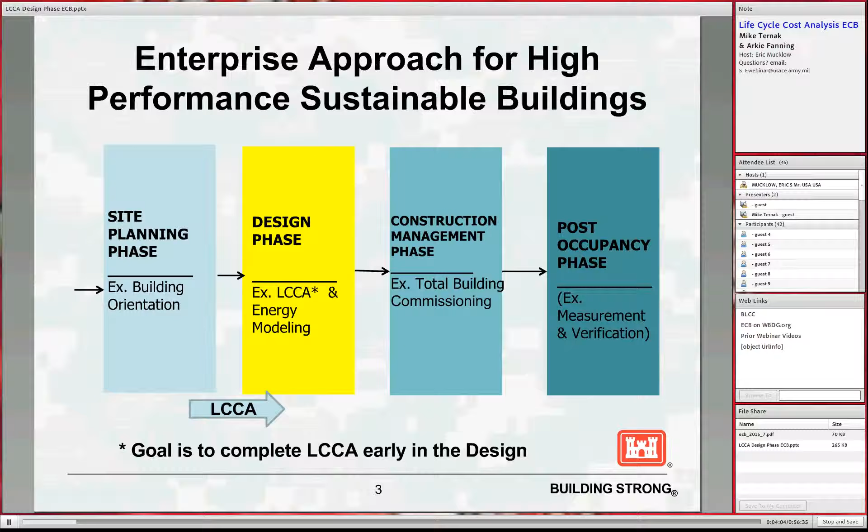So LCCA is an important part of this enterprise approach. It takes into account all the costs of acquiring, owning, and disposing of a building or individual building systems and identifying the most economical alternatives. So one of the most important takeaways from today's webinar is that it's important to complete the LCCA early in the design phase, while there's still a chance to refine the design to ensure a reduction in life cycle costs.

Well, why perform LCCA? First, because it's legally and policy mandated to us. Federal administrative laws require that buildings be designed based on the lowest life cycle cost or most life cycle cost effectiveness. And this is imposed through the Code of Federal Regulations on all federal agencies. Then if you drill down, DOD has separate LCCA guidance through a Tri-Services Memorandum of Agreement on criteria standards for LCCA and economic analysis for MILCON design.

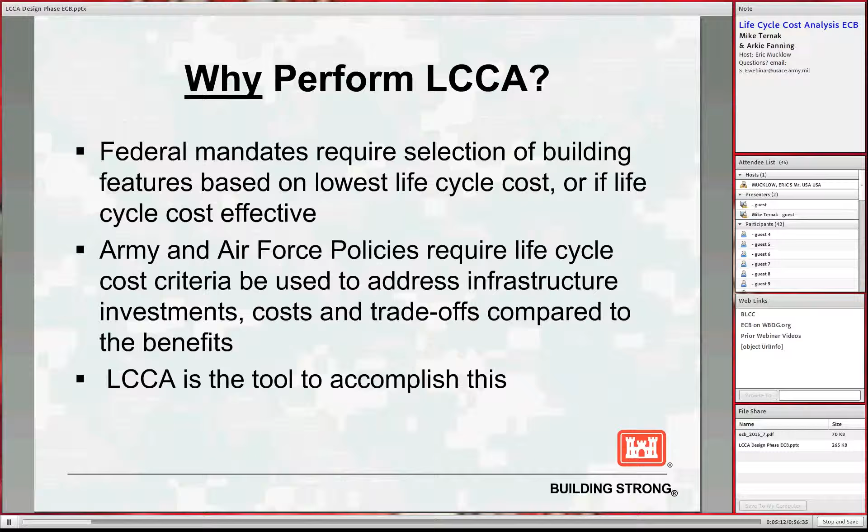Then if you go down to Army and Air Force, both the Army and Air Force Sustainable Design Development Policies require LCCA as an integral part of their process. The Army Sustainable Design Development Policy Update actually states, the Army will plan, design, build, and operate facilities to achieve the highest performing sustainable design that's life cycle cost effective within the program amount. LCCA is the tool to accomplish this.

So performing LCCA for energy conservation alternatives helps ensure that we're designing and documenting energy and water conservation measures that demonstrate a strong return on investment and minimize the total ownership cost of the facility. LCCA is the method or tool for assessing the total cost of facility ownership for designers and for the owner to make important decisions. It takes into account all costs of acquiring, owning, and disposing of a building or building system.

LCCA is especially useful when you have different project alternatives that fulfill the same basic performance objective or requirements, but have very different initial first costs and operating costs. The LCCA allows these different alternatives to be compared in order to select the one that maximizes the net savings.

As an example, LCCA would help you determine whether the incorporation of a high-performance HVAC system or a building envelope glazing system is cost-effective or not over the life of the facility, especially when these different systems may have higher initial costs but result in dramatically reduced operating and maintenance costs. The LCCA will let you go through the analysis and determine which one is the most life cycle cost effective and makes the most sense from an economic perspective.

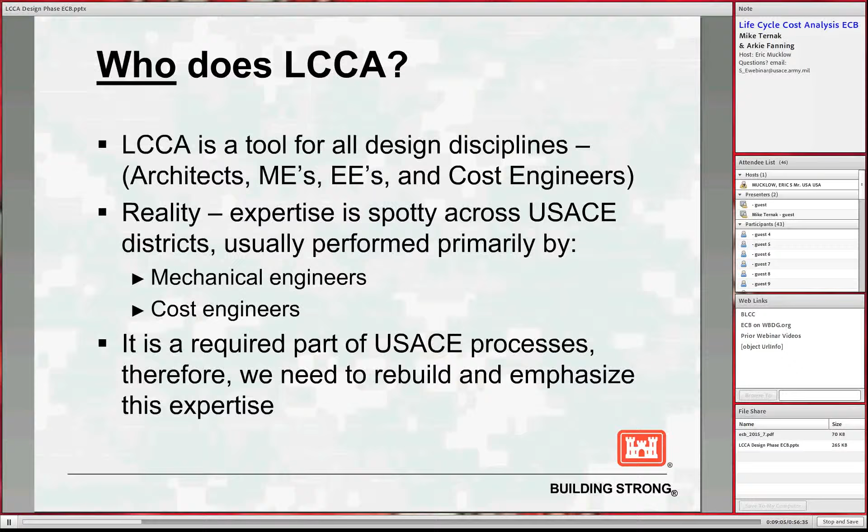Some of the project team roles and responsibilities for performing LCCA would include project managers, who are responsible for funding and putting together an integrated team. Design teams are responsible for employing integrated design principles to develop the energy and cost input data for implementation of any individual system or building level LCCA. Typically, passive building energy features are done by architects or sometimes civils. Active systems, by mechanical and electrical engineers, and cost engineers typically would provide all the cost input data for LCCA.

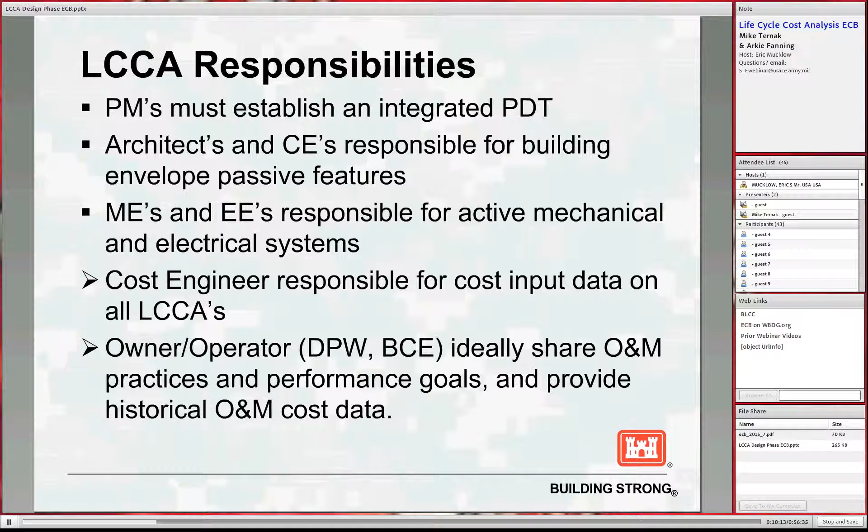Owner, DPW or base civil engineer staff would share O&M practices and provide historical cost data, if they have that, for input into the operational costs. And overall, the design districts are responsible for assuring overall execution of the LCCA, including performing any quality assurance for AE designs.

Now, the ECB does address design-build projects, and for design-build contracts, this ECB provides guidance to perform LCCA prior to finalizing the contract documents, or the RFP, and to try and get as much of the LCCA performed during development of the RFP as possible. The approach is that the preparer of the RFP has already completed an LCCA in the RFP development stage and includes the selected alternatives as requirements in the RFP itself.

Design-build contractors that provide proposals that conform to the requirements of the RFP would then not be required to submit or perform an LCCA. The intent of this is to avoid tasking the design-build contractor with performing an LCCA after award that might significantly increase or decrease the scope and/or cost of a lump sum firm fixed price design-build contract.

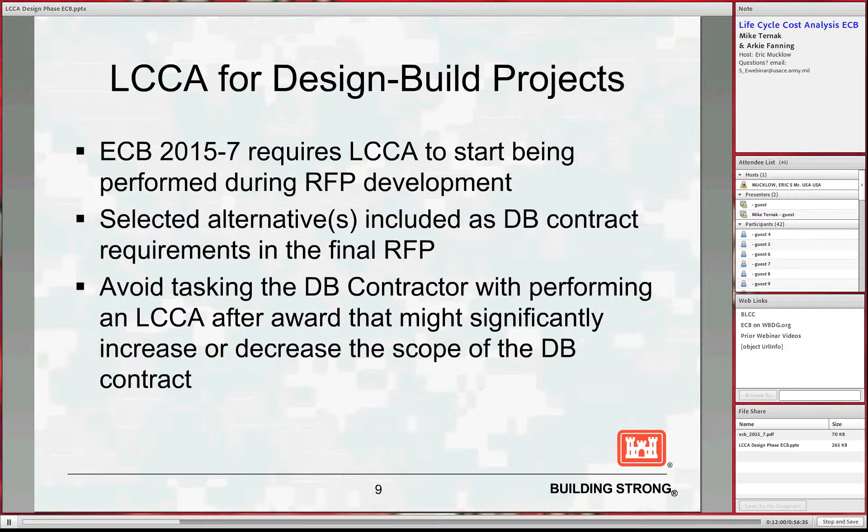So the design-build selection criteria would require that any contractor proposing on an RFP that offers betterments or improvements to the requirements defined in the RFP would have those betterments supported by an LCC in their proposal. Overall, the objective for design-build contracts is to try and make the government more responsible for the LCCA, and basically the design-build contractor for everything else as much as possible.

So what is required? All project delivery teams must use the Building Life Cycle Cost (BLCC) program and follow the methodology that's identified in Subpart A, Title 10 of the Code of Federal Regulations, Part 436, to perform the LCCA for each building. The BLCC program incorporates factors developed by the National Institute of Standards and Technology, or NIST, complies with 10 CFR Part 436, and includes a MILCON analysis module.

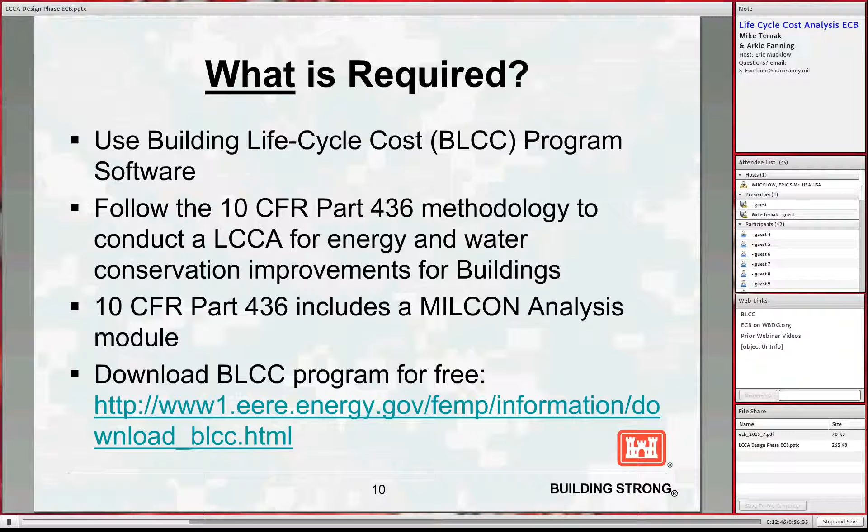The link on this slide and the link provided in the ECB is the one that provides access to download the BLCC program for free, and there's guidance within when you download this on how to use it.

So the LCCA requirements are significant design activities that have to be performed for a building design to achieve high performance and sustainability facilities that comply with the Unified Facilities Criteria 1-200-02. Projects are required to meet the minimum energy and sustainability requirements described in the UFC. The UFC defines the minimum building requirements and is used as the project baseline for life cycle cost comparisons.

For a MILCON project, we use a 40-year life cycle in the LCCA, or the projected life of the facility if that's different than 40 years. So the LCCA includes all costs of acquiring, owning, and disposing of a building or building system, including all O&M costs.

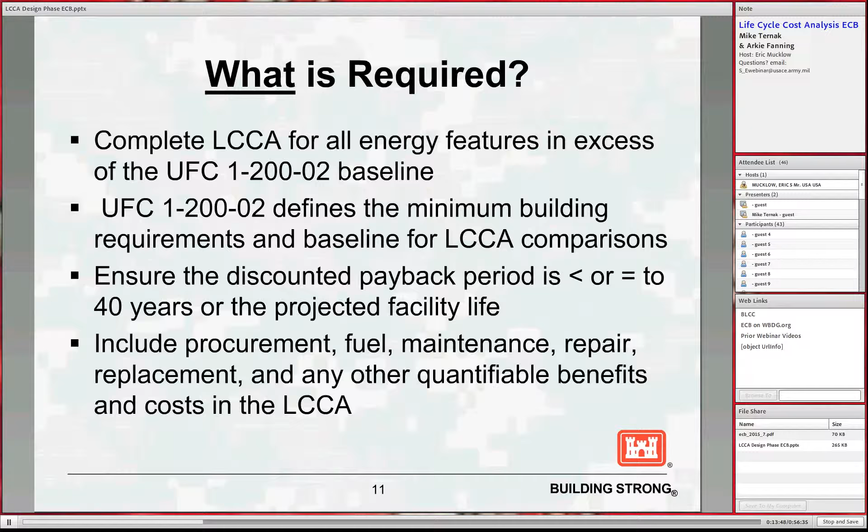The ECB requires that the LCCA analysis needs to be a separate part of and included in the design analysis or basis of design. For consistency, the LCCAs are to be conducted in accordance with the ECB guidance and applicable references. The final LCCA documentation must include a comprehensive summary that defines each alternative considered, including the assumptions and references

provided for each parameter. The assumptions should be clear, documented, and of a level of detail that's sufficient that an independent third party could come in afterwards and duplicate the results of the LCCA based on the documentation that's provided in the LCCA documentation. LCCAs are to be completed using the same matrix of baseline information consistently across different alternatives to ensure a fair comparison is made between the alternatives.

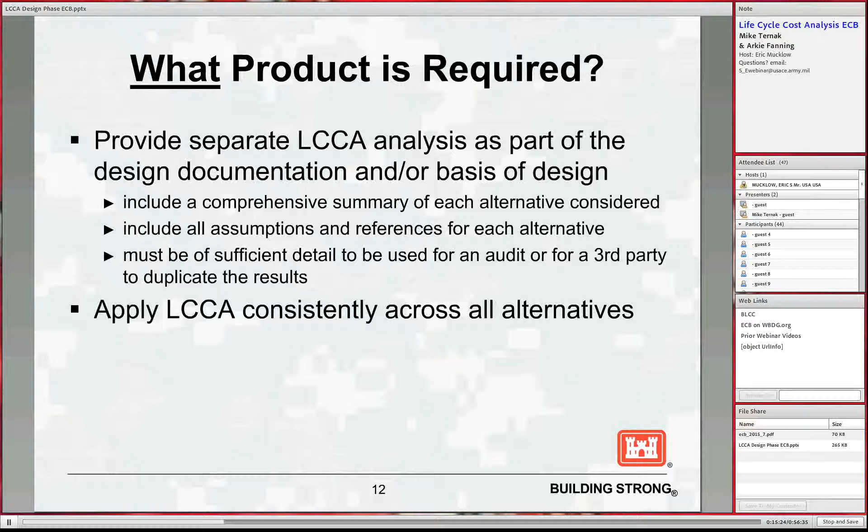The LCCA is not the decision maker for alternatives. It provides unbiased information. If the most life cycle cost effective alternative is not selected, the LCCA documentation should explain the rationale or justification why another alternative was selected, which may include operational reasons, aesthetics, life safety, or perhaps budgetary reasons.

Operational expenses for energy are based on consumption, current rates, and price projections. Because energy consumption, the building configuration and the building envelope are interdependent on each other, energy costs are often assessed for the building as a whole, rather than for individual building systems or components. However, the ECB is written around either a whole building LCCA or individual sequential systems analysis.

For most MILCON projects, prior to the start of the design phase, the building site, orientation, and configuration have been established in the planning phase, the DD 1391, per the UFC. Early in the design phase, the building envelope, basic design features and components such as the roofs, walls, windows, fenestrations, daylighting need to be selected and analyzed for life cycle cost effectiveness. Selection of these passive, non-mechanical features helps minimize energy demands for the active systems.

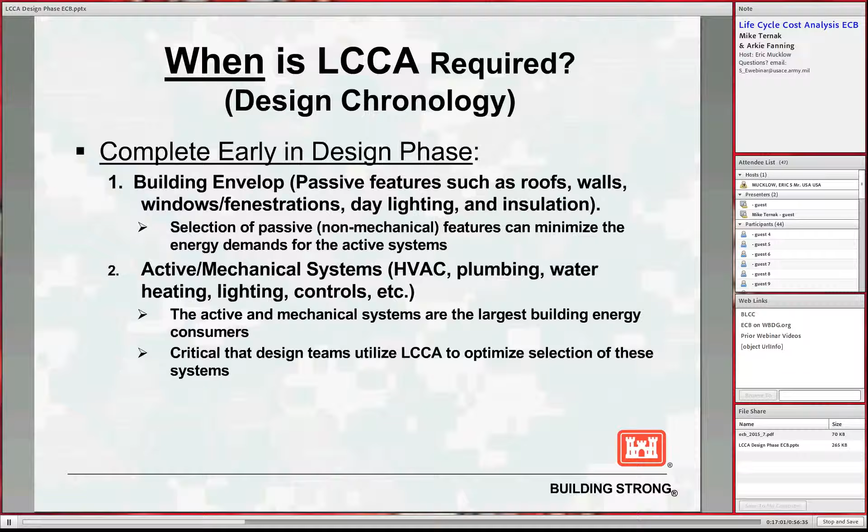After these passive building envelope strategies are determined, the active mechanical systems such as the HVAC, plumbing, water heating systems, lighting systems, and control systems are selected, analyzed, designed, and integrated into the overall design. These active mechanical systems are the largest building energy consumers, so it's critical that design teams utilize LCCA to optimize selection of these systems.

Now, when LCCA is required in the delivery schedule, the LCCAs must be initiated to validate the cost effectiveness of the highest energy efficient project within the program amount. During Code 3, the project scope and cost must be shown to support a cost effective project as described in the DD 1391. The final LCCA per the ECB is to be completed no later than Code 3, or typically what is considered to be the conceptual or 35% design.

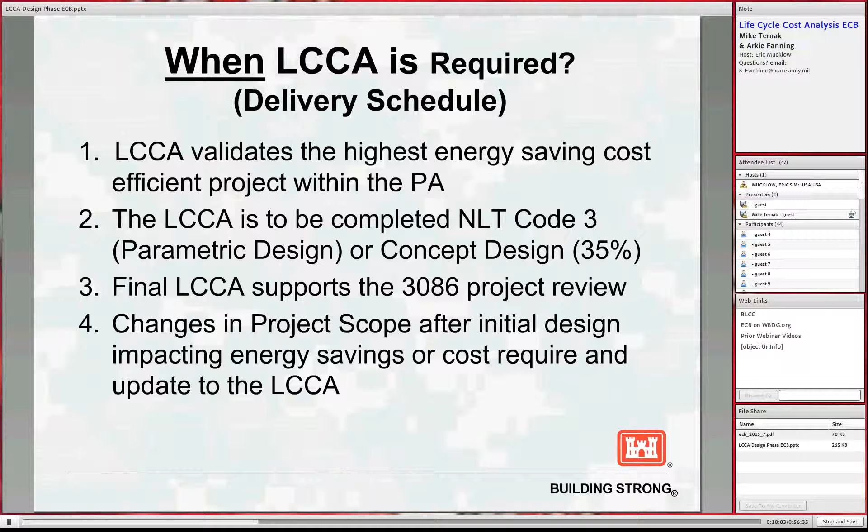The LCC must validate a cost-effective project as part of the 3086 project review and be made a part of the design analysis and available for review. After that, any subsequent changes in project scope beyond the initial design that impact energy savings or project costs would just require an update to the LCCA that's already been completed.

Well, at this point, that covers the procedural policy process steps through an LCCA. At this point, I'm going to turn it over to Arkie Fanning, who's the Chief of Cost Engineering for the Huntsville Center, and who's going to go through some LCCA basics. Thanks, Mike.

Performing an LCC analysis. The primary and the driving reason to do any life cycle is to prove out why you're choosing the alternative from a cost-effective standpoint. And it may not be that at the end of the day that's the alternative you select, but it's very important that you're able to say, well, we looked at that and didn't go with it because.

That gives the decision maker the flexibility to defend to anyone that needs the information why he needs extra funding above what the life cycle minimum would require.

Some of the basics. It provides a method of providing a rationale for why you need the amount of capital investment you need, particularly if you need to increase the capital investment, and increasing capital investment would save you money in the future. You can show that. Often for different federal funding projects, requirements, you'll need to be able to show, here's what I did for life cycle and here's why it's most cost effective, in order to show that you are spending the taxpayer dollar wisely.

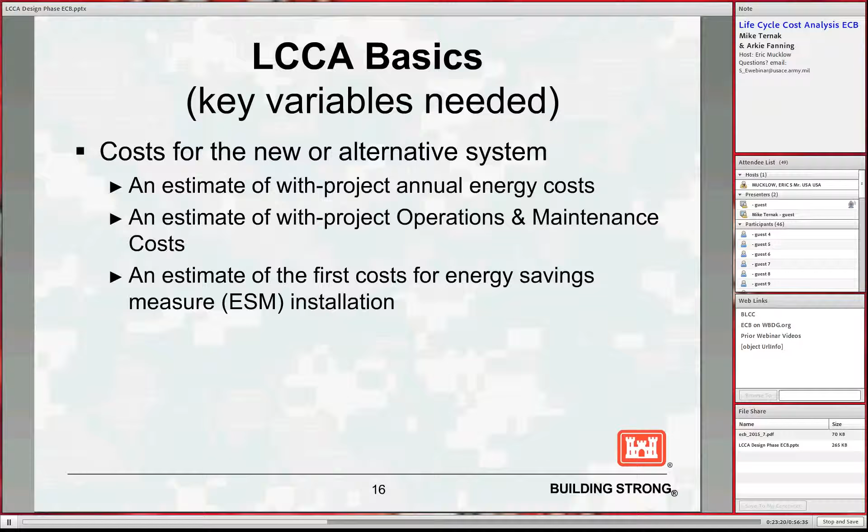Here's some sources, and again, I've already mentioned the DPW. That is an excellent place to get particularly O&M data, and it is wise not to tick those people off. So the first thing I do typically when I go to a new base to try to gather data is go talk to some of the old engineers there in the DPW and try to put myself on a good footing with them.

If you can't get good data from them, you can go talk to a design engineer, and we're all design engineers. You know how easy we are to get along with. So, but it is a source. And then you can get all the cost if you can define the cost. You can get the cost from the cost engineer that's supporting the project. And again, he may get that from M2, he may get that from Means, may get it from Richardson's. There's several sources of information, but if you can define it to the point he needs it, he can give that data to you.

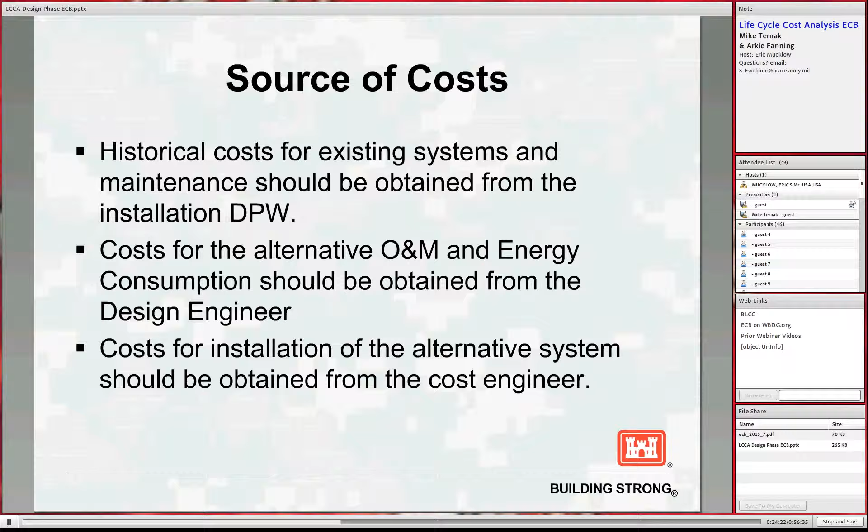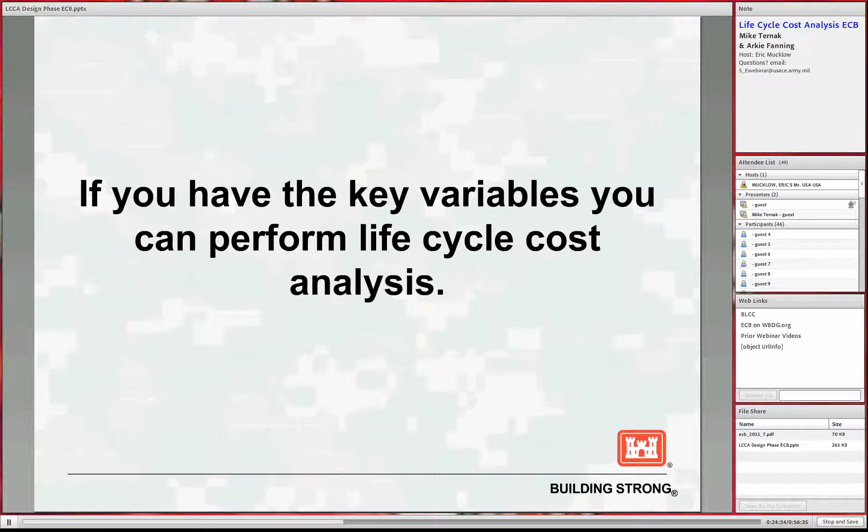If you have the key variables that we've told you about, you can develop a life cycle cost analysis that is defensible and repeatable, and both of those are important. Capital cost of new equipment, what it's going to cost to install it. For the maintenance, you're going to have the required maintenance and labor rates and compatibility, all of the sources.

All the synergy that's possible out there needs to be known. If things operate more effectively with other things so that you've got some sort of chain going on, that needs to be recognized in your life cycle. Operations costs, energy and fuel use, labor for that. And the most important thing that you don't do and should do is sensitivity analysis.

Here at Huntsville Center we do a lot of life cycles, but we also review a lot of life cycles. And we'll go into later on all the things that we see or don't see as a regular routine. But one of the things that really bothers me is you will get a life cycle in that says the net present value is $3 million for this alternative and $2.5 million for that alternative, and there won't be a sensitivity analysis. So what you have said is this is the right answer. You might not have known you said that, but that's what you said.

And again, we don't know what the future holds. So what you should say is over a range of alternatives, and your cost drivers are defined by whatever's in your life cycle. So you should do an analysis that says, if my energy costs change by 5%, then I want to choose the other alternative. If my O&M changes by 4%, I want to use the other alternative. That is just as important, in my opinion, as doing the primary, or what we call the base life cycle. So please watch out for that, and please do it when you are looking at your life cycle analyses.

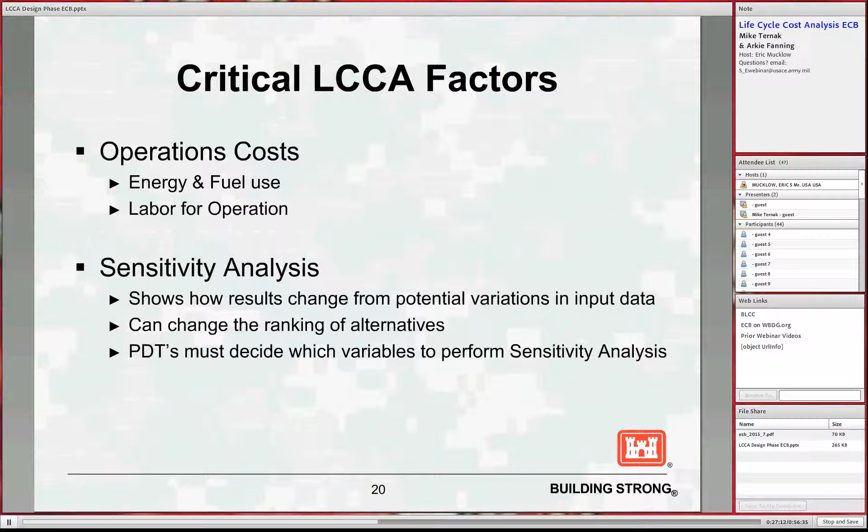Some other things we don't see, often not drivers, but sometimes are: the demolition cost we don't see often. People, I guess, assume that you're just going to abandon it in place, or that, like most things with the government, it's going to stay there forever until they tear it down. But you typically need to make some sort of assumption on whether or not you're going to dispose of that and calculate the cost for that. It's difficult to do, but recognize that that will happen, and if your alternative hinges on that, document that.

The salvage value at the end of the useful life we often do not see. People just assume at the end of 40 years it's no good anymore, we're going to throw it away. That may not be the case, or whatever the life cycle is for an electronic or mechanical component, maybe 5 to 8 years. Again, you need to document why you're making whatever assumption you make in your analysis, and you should run a sensitivity parameter on it.

The easy things are the discounting and escalation rates and the differential escalation rates. You can get that from OMB and from NIST, just do a search based on those parameters, and it will give you the latest guidance. We often see people misuse the NIST guidance because they don't understand it well. But if you do it right, all it's saying is that you have a base year, and from that year, the NIST guidance tells you years 1 through 5 are going to go up or down by some percentage for, say, electrical power, gasoline, kerosene, or whatever.

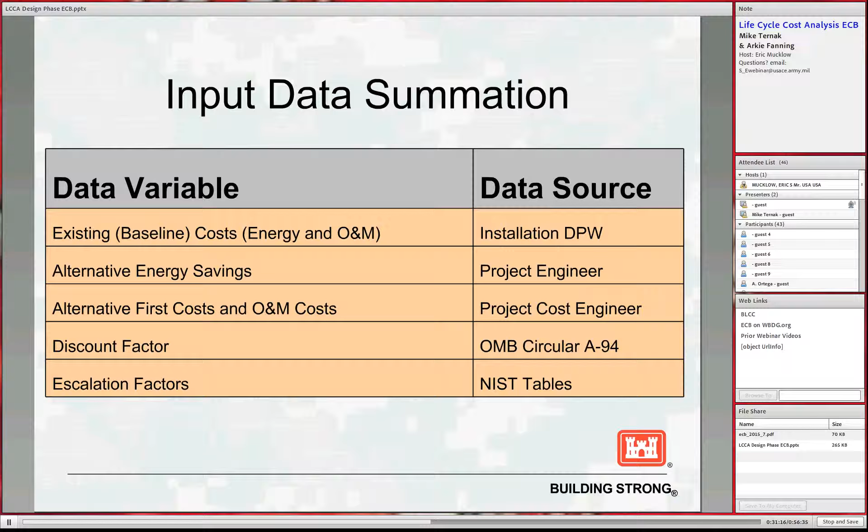All of our cost engineers should know how to do basic life cycle cost, and if not, they can come to us and we'll be glad to give them a quick primer. It's not that difficult, and cost engineers that live in the cost world should know how to do it or be able to pick it up fairly easily.

Some of the metrics that you'll see, and these are just the two main ones, but there are many others out there, and I think I got another chart in here that shows some more. But net present value is the one most important thing to understand. And I don't mean that just from a life cycle for the government. In your own personal life, you should understand net present value.

That should be a driver in the economic decisions you make as to whether to purchase a car, lease a car, whether or not you want to retire at 62, retire at 66, so when to take your Social Security. Net present value tells you the most likely impact of those decisions. And again, it's not always about maximizing your savings or minimizing your cost, but that is one factor that you can tie down pretty well if you understand it. And net present value tells you if you've got 4 alternatives, this one is the best based on the best information I have before I do my sensitivity analysis.

The savings to investment ratio is pretty simple. It's what's my life cycle savings and how much does it cost. If it's greater than 1, then it's a net present value that's greater than 0, therefore I want to pursue it. If you live in the ECIP world, you understand that 1 is not sufficient. Typically 1.25 is a minimum in order to get funding, because this is not that precise a game. So the people that make selections as to what does and does not get funding want a little bit more assurance than a 1.0. But in the private sector, it's used often as a quick screening tool, and the higher SIRs will be the ones they concentrate on to see whether or not they want to spend their money there.

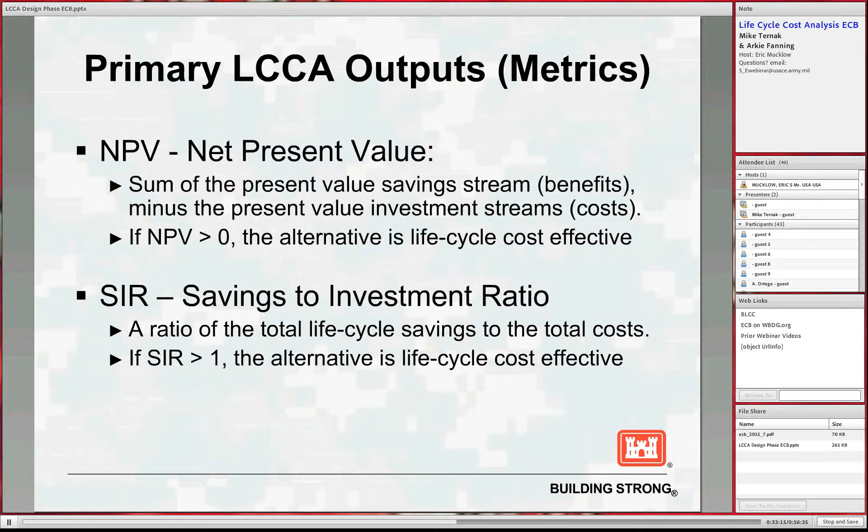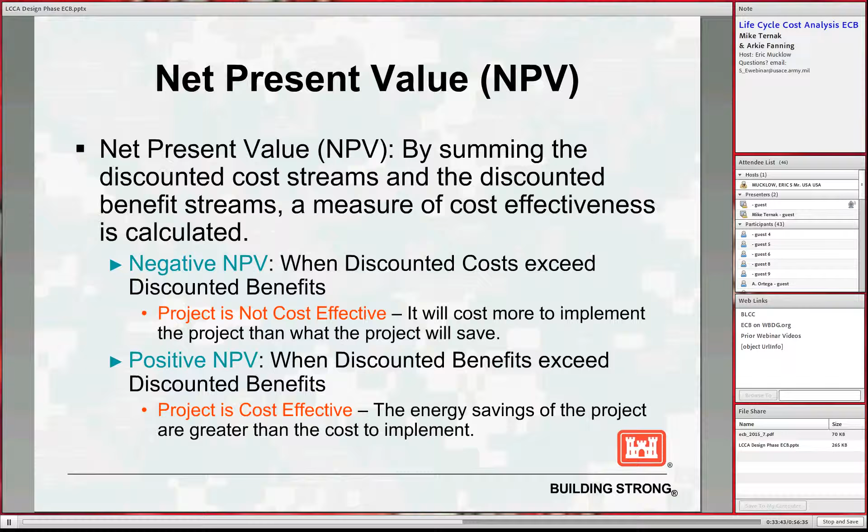A little bit of net present value description. Negative net present value just means that it costs more than it's worth, therefore I don't want to pursue it. A positive means it does give me money, therefore I do want to pursue it. Again, that's just on the cost side. There are many other things that go into the analysis to make the final determination as to which alternative is selected.

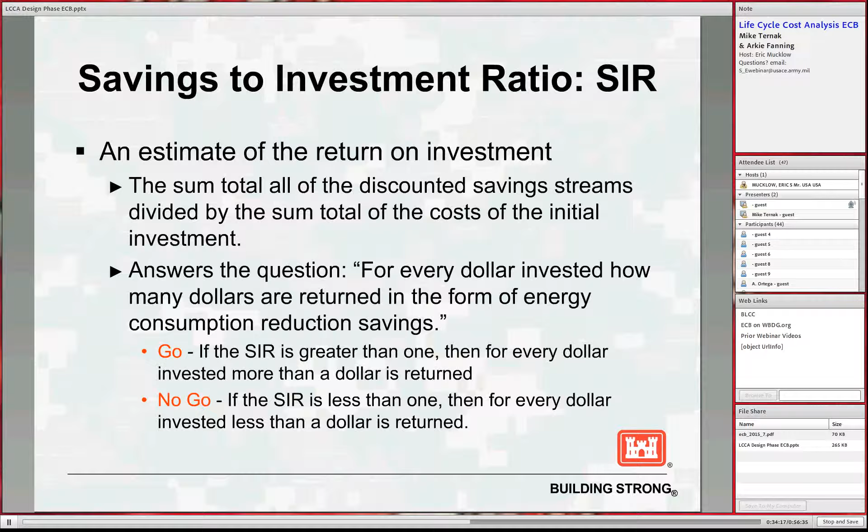So again, you sum all the discounted savings, sum all the discounted cost, look at it: go if it's greater than 1, no go if it's less than 1. ECB has a pretty good form you can use, and you can look at that and take it apart and develop your own SIR if you care to for other circumstances. But it is pretty simple. Once you understand the time value of money, which is all discounting is, then it is putting everything at one point in time and making your decision based on that one point in time for the cost or the savings.

Some other things you'll see. A benefit cost ratio is something that they do a lot on the civil works side, and coming up with the benefits and the cost are not as simple as what we experience in the military world, because it's more difficult. Not because the math is harder, but because you've got to take into account public good often, where we don't have to in doing our numbers. But again, the concept is simple. My benefits have to be greater than my cost. So if you divide benefit by cost and it's greater than 1, it's something I want to do.

Simple payback will get you in trouble. I don't ever use it myself, but a lot of people do. It's kind of one of those rule of thumb things where you kind of look at it and say, well, it looks pretty good, therefore I'm going to go with it. And a lot of people use it as a screening tool, and for that it's probably okay. But what it says is, when do I get my money back? But it doesn't discount the dollars. So if you're talking a short time frame, a year or two, it's not going to be much difference. But if you're talking 7 or 8 years, there might be a huge difference between alternatives. So I use simple payback very rarely, but a lot of people do use it. And again, it's simple. It's when do I get my money back based on non-discounted dollars. So it's how much does it cost me, how much is it saving me, when is that profitable for me.

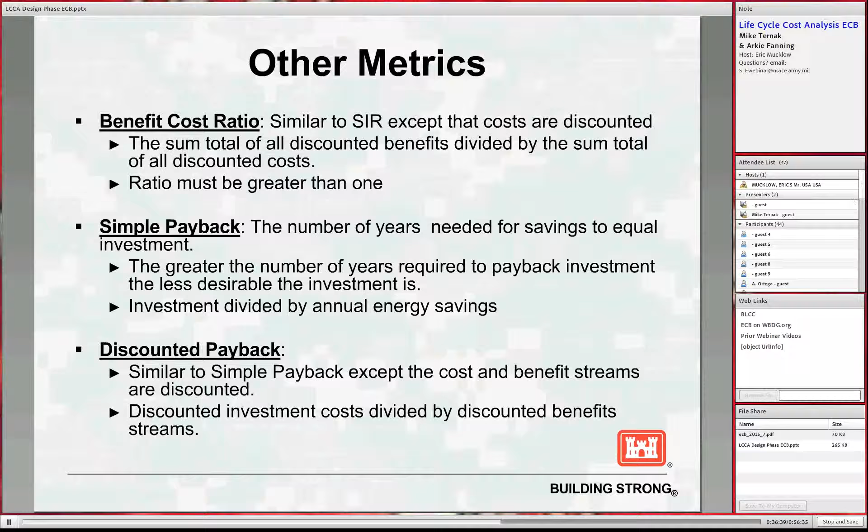The discounted payback is similar, but actually takes into account the discount rate of the money and of the cost and of the benefits. That is a very useful tool, and it will give you a precise number based on whatever information you put into it, and it will give you the same answer as the SIR and the net present value. And if it doesn't, then you've done the math wrong somehow, or you used different assumptions somehow. The way the math works, all of these should be equivalent. So if you do a net present value that shows positive, then the SIR is going to be greater than 1, and your discounted payback will be whatever it is, but it will be in those terms, which is the discounted rates.

Here are some common mistakes. The one that drives me nuts the most often is the sensitivity analysis. Of course, we do this a lot here at Huntsville Center. So it's the first thing I know to do when I get through doing my problem analysis. I got to show just how robust or how good it is. A lot of your decision makers won't see many life cycles. Therefore, if you tell them that alternative A is better because it's 3.2 million versus 2.8 million or whatever, they'll say, hey, that's good, go with it.

But what you should have told them is it's good for this given set of circumstances, but if circumstances change, you might want a different decision. And then they may know something that says, hey, this could happen, that could happen, or I don't like that assumption or whatever, and would change their decision. So as an engineer, you owe it to the decision maker to give him the best decision you can. And sensitivity analysis performs that within the limits, of course, of the mathematics.

Lack of common metrics: we'll often see discounted payback and payback mixed up, and we'll often see SIRs done incorrectly. Again, we do it for a living, so it was easy for us to find that one. But make sure you use the same metrics across all your alternatives, and make sure you do the math right. Misuse of common metrics: I've seen the actual inversion of decisions based on a cost versus benefit type deal. You choose the cost when you should have chosen the benefit, and make your recommendation based on that. Data entry errors, probably the biggest one, and we're all guilty of this, including me.

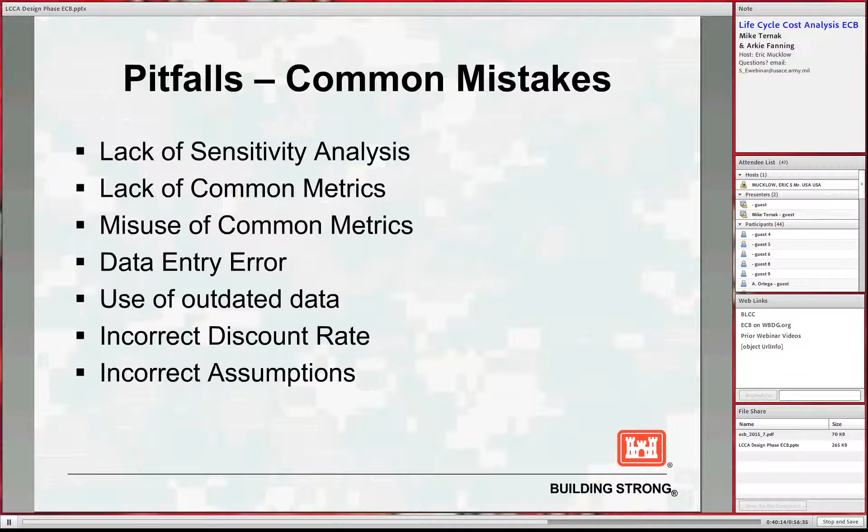So, okay, some final considerations. Life cycle is not the decision maker. It is one more input in the design or in the decision, whatever this happens to be. It should be unbiased, and it should not be used to drive a pre-selected alternative, which it often is. Okay, I probably shouldn't say that out loud, but it can be, I should say. It should be unbiased, and it's your best estimate of what something will cost, with everybody understanding it's not correct, but it's the most correct you can make it at this point in time.

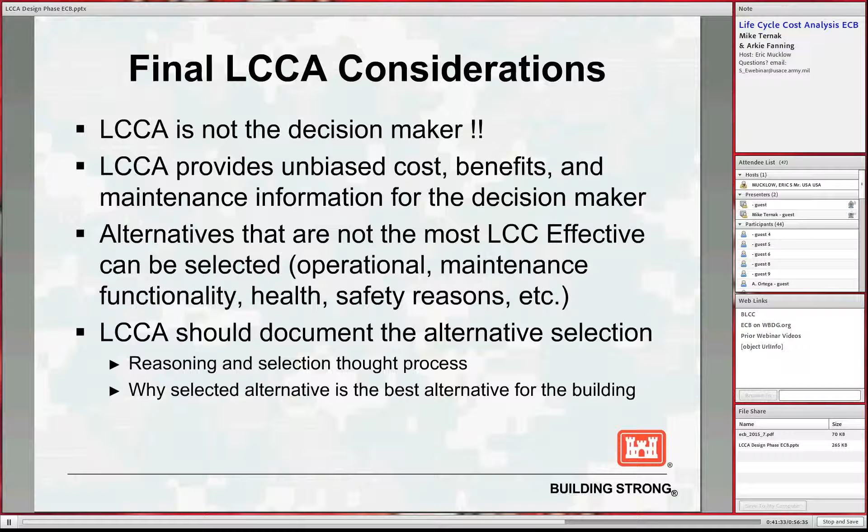Often we will select a non-cost-effective life cycle for other reasons. There are many, and it shows some here. Often synergy with other things is in there, and that's not shown here, but often that is in there. And the purpose of life cycle is to show you have done your best to make sure that you have selected the correct alternative, why you selected it, and why you are spending taxpayer dollars appropriately for the decision maker.